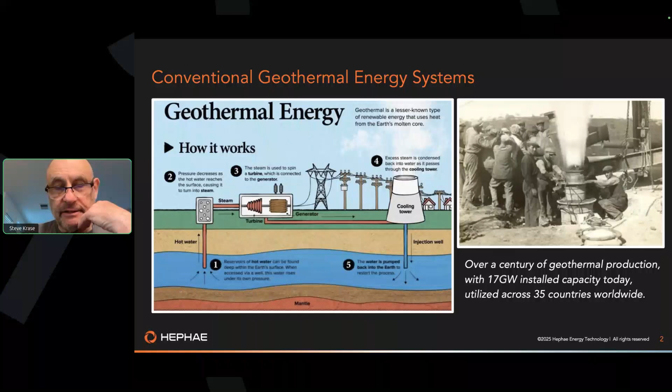But what we're talking about today - the promise has always been, is there any way we can use the heat in the earth without relying on finding these magic pockets of steam or water to create electricity? We've been trying for a long time, the industry has, to figure out a way to take advantage of this heat.

What we're calling next generation geothermal has the promise of generating electricity anywhere on earth by circulating working fluid through what used to be called hot dry rock - now it's just called next generation geothermal. Today there are three major types of approaches to this. There's more, but these are the three we're looking at that seem to show the most promise.

But the other thing you can do is use that hot water for district heating. In Europe, a lot of cities have a district heating network, so you can just take the hot water and pump it into the heating grid, not the utility electric grid.

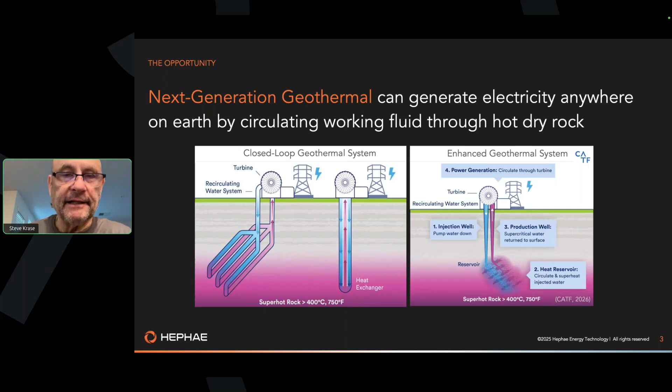One of the things we see as we go around and talk to investors and people not familiar with the drilling industry is the question: why do you need electronics for downhole? There's just a lack of understanding of what's required to actually drill these wells and put them in the right place.

Right now we're testing the MWD portion of this, and we hope to be in the ground with the complete system, including the steering head, sometime in 2027.

The existing system is rated to 210 degrees Celsius circulating temperature, with a 230 C survival rating, but we have plans to push this to 300 degrees Celsius. I'll talk about that in a minute.

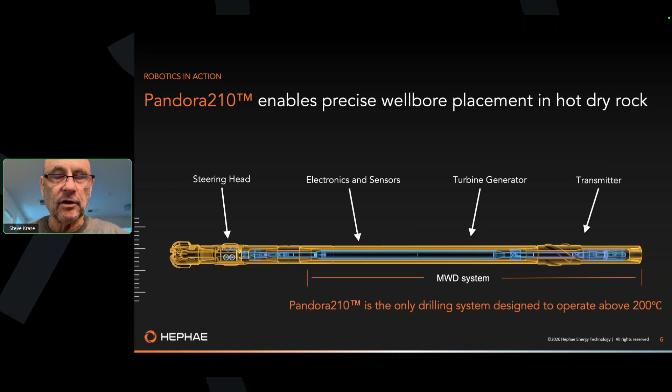So why are we doing this? When you look at the electricity demand projected by 2050, whether it's 50 or 70,000 terawatts, it's a big number, and it's increasing considerably. That's why we're seeing this significant amount of investment projected to continue increasing.

We've just seen the hot rock bill introduced into the U.S. Congress, and Mazama is another company that's drilling EGS wells. They just announced the world's hottest EGS system. They're going to be targeting 370 C rock on the Newberry volcano starting later this year.

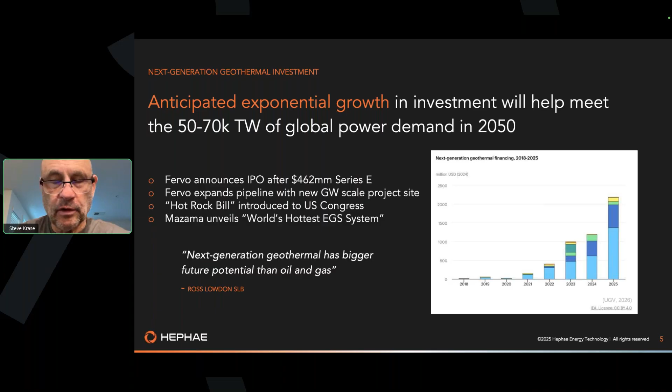So we think, and so does a few other folks in the industry. Here you've got a quote from our friend Ross Lowdon over at Schlumberger, or SLB, that next generation geothermal has bigger future potential than oil and gas. What that means is we believe there could be as many rigs drilling geothermal wells in the United States and around the world as there are oil and gas wells.

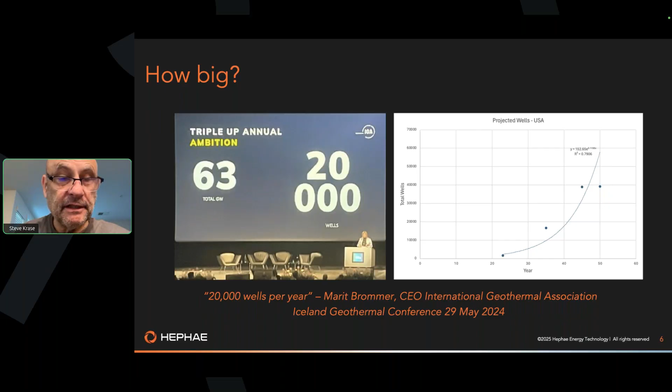This is independent from Marit Brommer from IGA, and her projection is 20,000 wells, total of 63 gigawatts by 2050. And yeah, this could actually be conservative in our opinion.

The goal here is to get to the point where we're competitive with natural gas, and we believe we can do that by combining hotter rock with longer lateral length and bigger hole size. The challenge here is the current projects rely on existing oil and gas technology, and that limits the temperature that we can access.

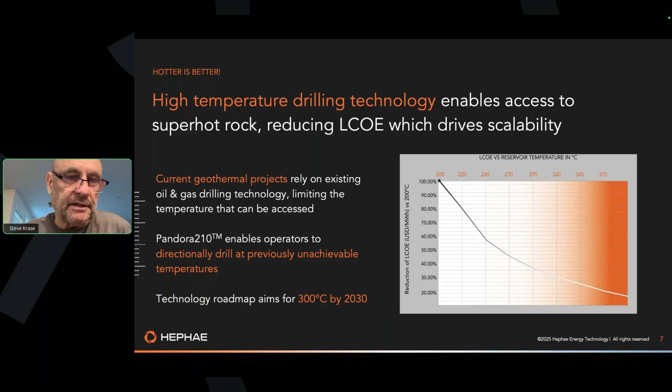So a little bit about the oil and gas capability. When I first started in '78, mil-spec electronics were 85 degrees Celsius, and that's what we used. We inched our way up to 100 and 125 Celsius. And then finally, we had 175 C tools in '96, thanks to our friends at Sperry Sun. And then we really haven't moved very much since then.

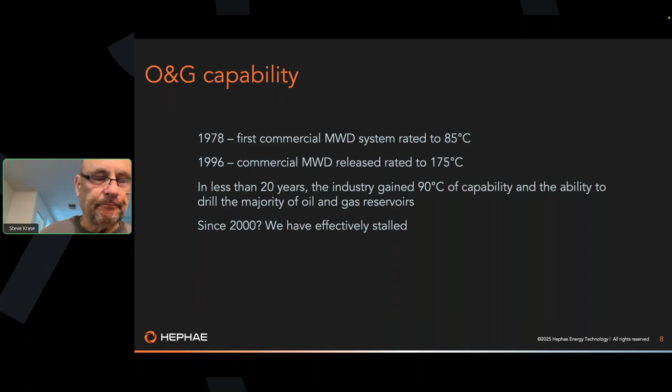There are some systems out there that are 185 C, 195 C, 200 C systems, but they're essentially 175 C systems that have been tweaked. Basically, in 20 years, the industry has gained about 90 C of capability, which gives us the ability to drill the majority of oil and gas reservoirs. But we've pretty much been stalled since 2000.

Some things that we do today to enable the use of standard MWD systems are coated drill pipe, insulated drill pipe, and mud chillers on the surface that can keep the drilling fluid cool. The chillers reduce the temperature of the fluid that's introduced, and the coated or insulated drill pipe can keep it colder for longer. But there's a growing recognition that these technologies just are not a complete solution.

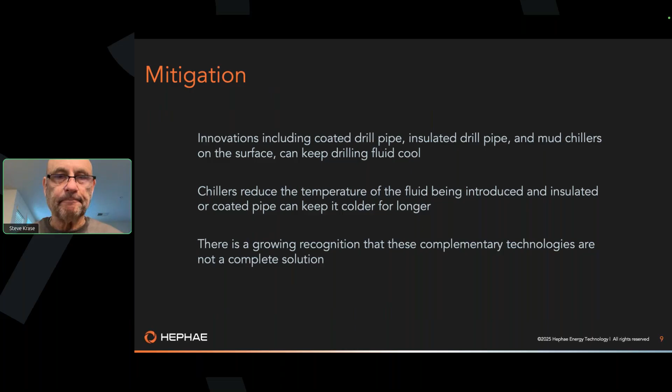One of the other things you hear a lot when you talk about geothermal wells is this story that it's very expensive to drill these wells. Well, you have to be careful when you hear that, because a lot of the times people are talking about older conventional geothermal wells that were drilled without a top drive, without a PDC bit. We believe the state of this next generation geothermal industry right now is roughly where unconventional oil and gas was in 2009. So we expect to see the same improvements in drilling rate and reduction in drilling costs that we've seen in unconventional oil and gas as we get further into this development.

Just as an example, when I started my career, drilling granite was just something you didn't do. In fact, you didn't even want to drill shale. It was not unusual to drill 3 to 5 feet an hour if you hit a shale bed offshore. Now we're drilling shale in excess of 300 feet an hour, and we're drilling granite 100, 200 feet an hour. So we anticipate that improvements in drilling technology here, as we learn more about drilling these hot dry rocks, which are a lot of times igneous basement rocks, we're just going to keep getting better at it.

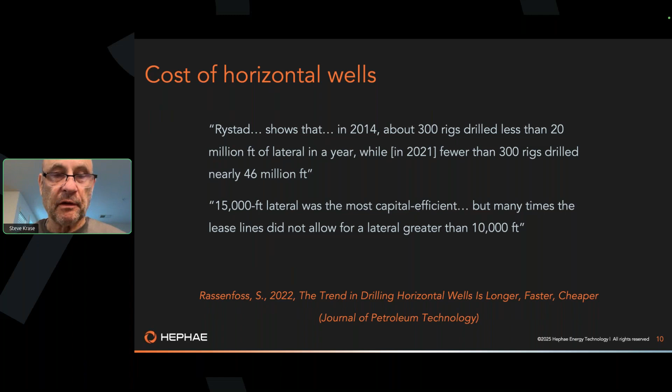Here's an example of the evolution of directional drilling in the United States and its cost. In just 20 years, the percentage of wells in the U.S. moved from 12% to 85%. And as we drilled these wells and gained more experience, we increased performance by more than 3x. We expect the same kind of improvement in next generation geothermal.

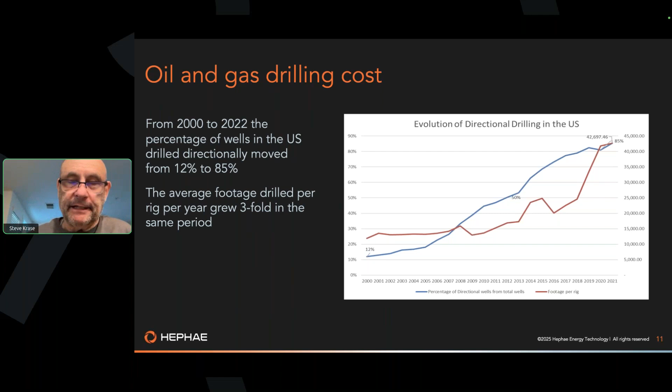So let's talk about some of the mitigation techniques. One of them is insulated drill pipe. There are several different companies out there that use this, and we see it applied especially when you're targeting 350 degree Celsius rock.

Just to put it in perspective, right now the Haynesville is considered the hottest area we're drilling for oil and gas, at least in the United States, with reservoir temperatures in the 200 degrees Celsius range, plus or minus. What Mazama is targeting in the Newberry volcano is 150 degrees Celsius higher than the Haynesville.

And so in that environment, you've got to bring in some other things, but we don't think it's a complete solution. This insulated drill pipe is essentially a flask created in the drill pipe that keeps the fluid cool as you pump it down hole.

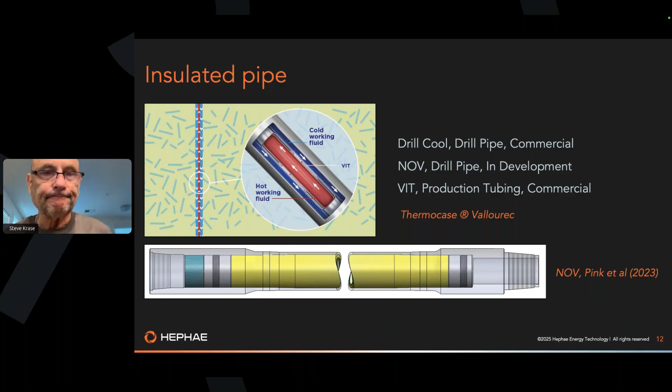The other thing we're seeing is a coating. This is very popular, and we're seeing it a lot in the Haynesville. It's a little more cost effective than the insulated drill pipe. These coatings are being used just about every place that's drilling any kind of wells above 175 degrees Celsius circulating temperatures.

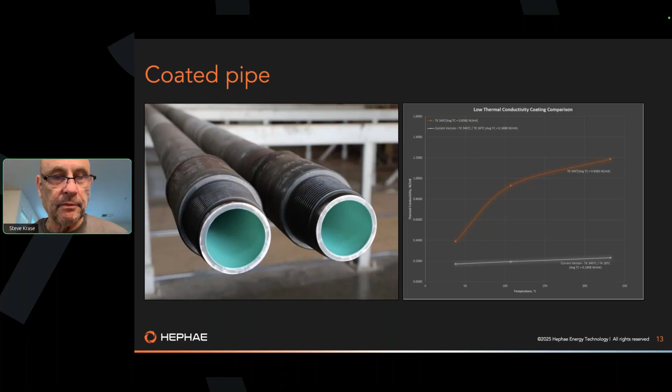The other thing is mud chillers. On some of these installations, we're seeing upwards of 2 to 3 mud chillers on location that are used to chill the mud as it comes out of the hole. It goes through these chillers, reduces the temperature, and then gets pumped back down the hole again.

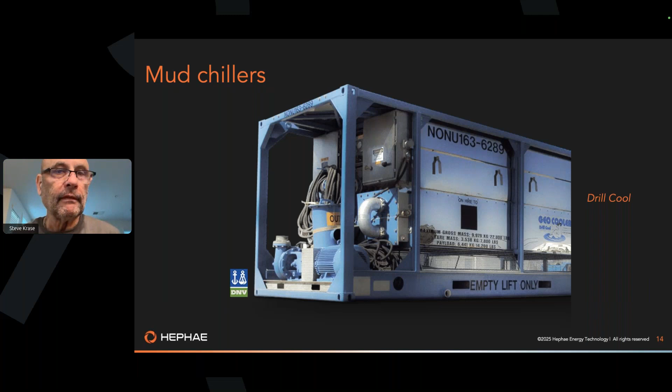So what we see these companies doing is something called staging. You've come out of the hole, you're in 250 degree Celsius rock, 300 degree Celsius rock. You've successfully kept it down below 200 degrees Celsius. You come out of the hole.

Now you've been out of the hole for 24 hours. The drilling fluid left in the hole has increased in temperature, approaching the formation temperature. You cannot run straight back to bottom because of limitations, primarily on the electronics. So you have to stop, circulate - it's called staging - cool down the mud, go a little deeper, stop, cool down the mud again, until you get it down to the point where the MWD equipment can handle it.

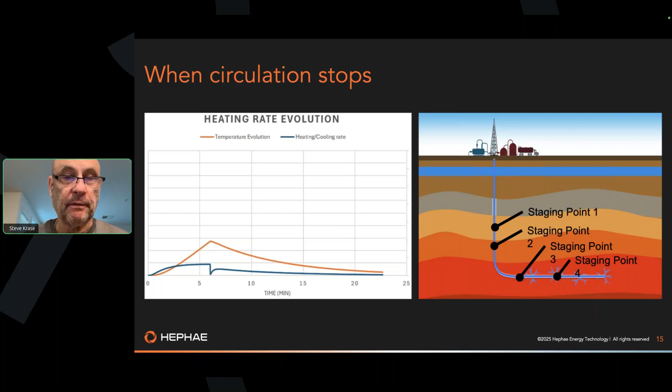This is very expensive, and it's one of the reasons why coated drill pipe, insulated drill pipe, and chillers aren't the complete answer. You still have to be able to get back to bottom without having to stage. So it's a huge savings to operators if we can eliminate this staging.

And this is what we would expect. There's a general rule that for every 10 degrees of temperature increase, you get a reduction in reliability by 50%. This kind of supports that.

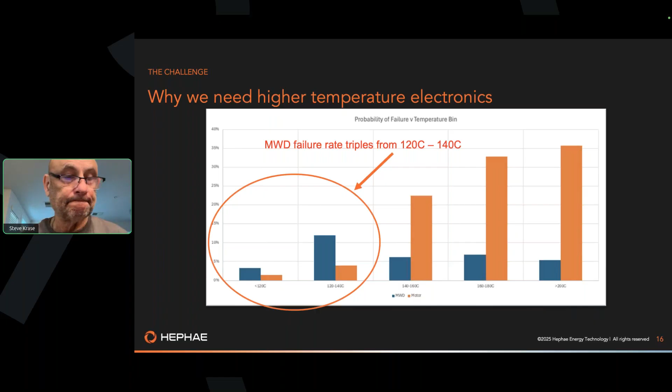Okay, let me go back. Sorry guys. What we will do is package this in silicone, or what we used to call it at Baker Hughes, Pookie, and just cover it up to protect it from shock and vibration. That's great for shock and vibration, but not great for temperature dissipation.

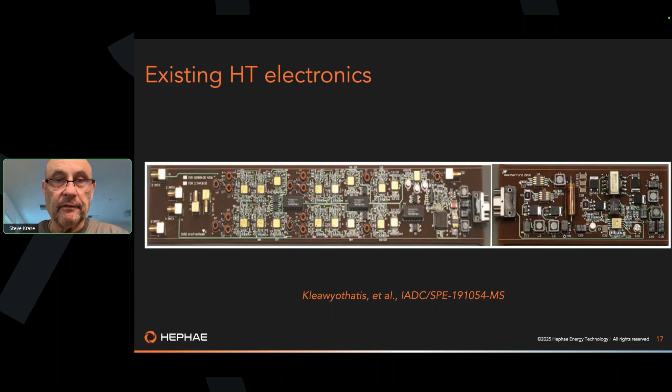So the historical approach is we screen electronics, put the high temperature rated components on a printed circuit board, and then screen them. We figure out which boards actually will work, and that's typically how we've developed high temperature equipment. We use screening of components and systems to get to the highest temperature we can, but we don't believe that can reliably get us above 200 Celsius.

Again, we think this has to go to 300 Celsius. So one of the things I've learned through my career is that if you want a step change in performance, you've got to start with a blank sheet of paper, and that's the approach we've taken. I'll show you that in a minute. But the historical approach has been screening.

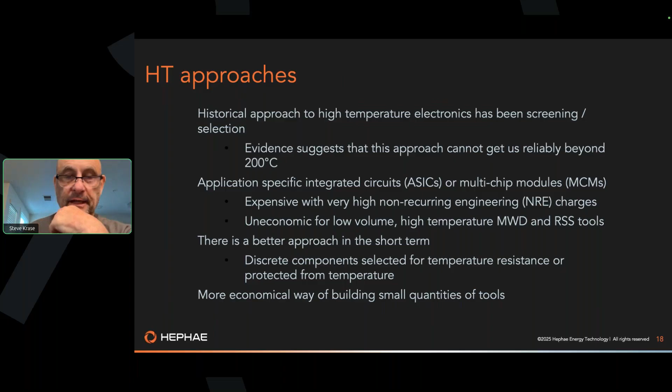You can also do ASICs or multi-chip modules. The challenge with those is they're very expensive and very high non-recurrent engineering if you have to make changes. Very expensive systems, uneconomic for low volume, high temperature measure-while-drilling rotary steerable tools. We believe there's a better approach in the short term by using discrete components selected for temperature resistance and protecting them from temperature. It's a more economical way of building small quantities of tools.

So when we look at this, we look at three key requirements. First, you've got to protect the assembly from the external borehole temperature. The way we see it, the mud chillers, the coated drill pipe, the insulated drill pipe do a pretty good job of keeping the drilling fluid cooler than the surrounding rock, at least while you're circulating. So we have that. Secondly, you've got to protect the components from themselves and quickly move the heat that the components generate internally.

John, my partner, John Clegg, likes to use the analogy of your cell phone. If you stay on your cell phone for very long, it heats up, and the same thing goes for downhole electronics. The electronics will heat themselves up, and we've got to move that heat away quickly to someplace it's not going to do any harm. We can't destroy the heat, but we can move it, and that's our focus.

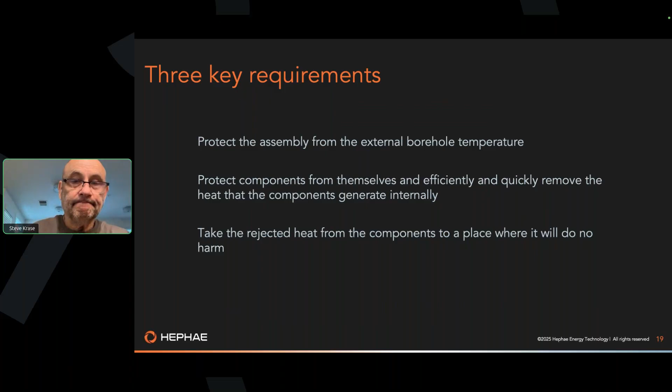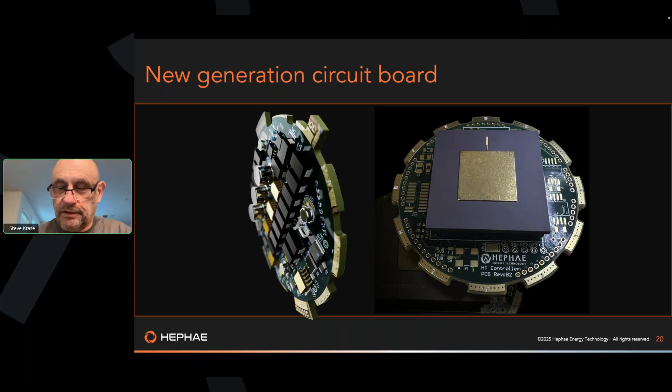It essentially operates sort of the reverse of a choke. The heat wants to move out radially from the center of that component. We've got special material embedded inside the actual circuit board itself that prioritizes heat dissipation. So we're moving heat very rapidly out to the tabs on the side of those boards, and then we have a stack of them. You can see the tabs are actually aluminum.

They're actually aluminum guides that will take the heat and move it out to the pressure barrel and down to a bulkhead we have at the bottom of the system. So heat comes off the center of the components very quickly out to these outer rings, and then it moves the heat out into the drilling fluid. With the drilling fluid going past, we've got a continuous heat sink that we take advantage of.

To remain cost effective, the cooling must be used selectively. You don't want to make the whole assembly work natively at the maximum rated temperature. If I have a set of electronics that works up to 300 degrees Celsius, I don't have to worry about it. If I have electronics or sensors that only go to 210 or 250, I can isolate those and treat them differently with some other cooling method.

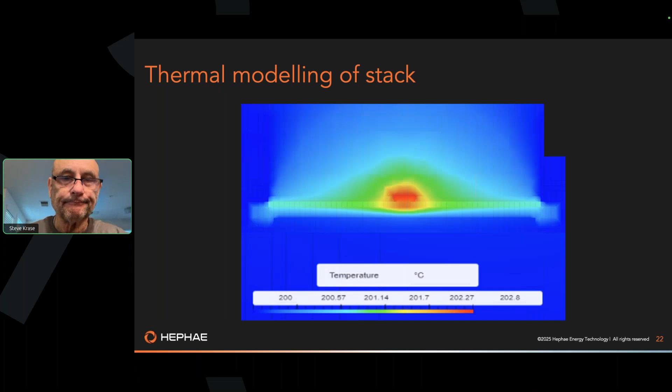So you don't want to cool the whole assembly. With the system that we have, we don't have to cool the whole assembly. If we want to cool something, we can put it into a separate chamber and keep it in its happy place. The design is optimized to allow for modular cooling.

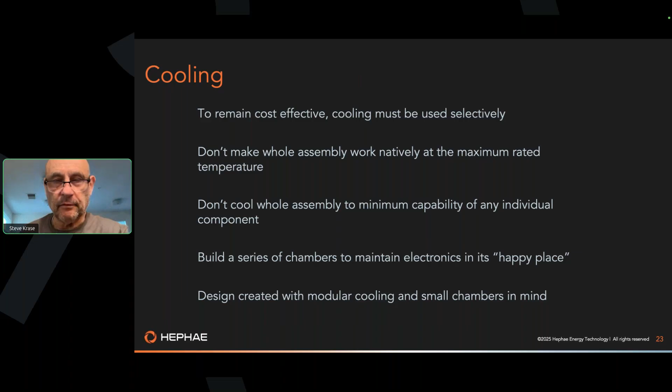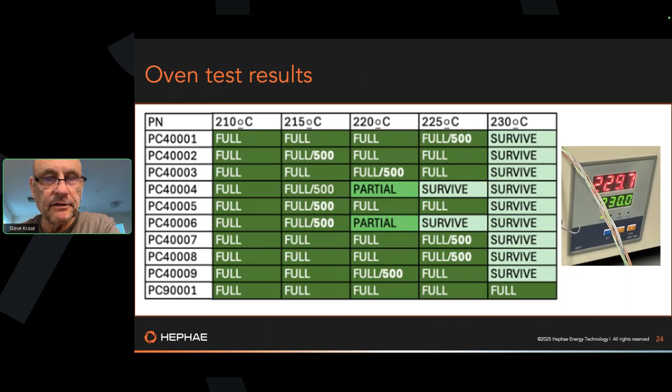We have done Hall testing on the system. Everything has been tested above 230 Celsius, 30 Gs of vibration, and everything is working above 210 Celsius with survival up to 230 Celsius.

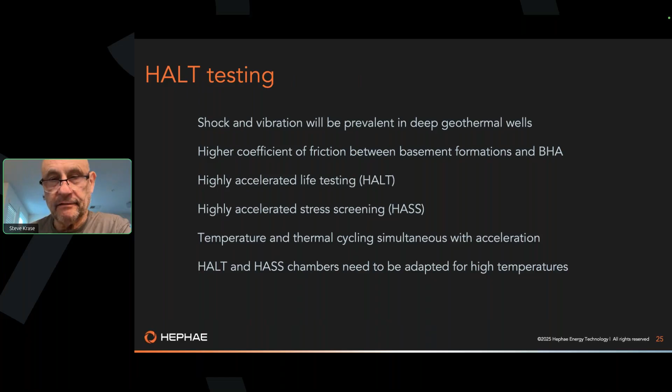We think that the shock and vibration in these deep geothermal wells, considering the high coefficient of friction in the granite, means we're going to see a lot higher shock and vibration conditions than we see in oil and gas. We've tested everything at a 50% increase of shock and vibration over what we'd normally do with oil and gas systems, using highly accelerated life testing to find the weak links, and then HASS screening for manufacturing and production.

I'll show you guys a little video. This is from testing we did at Dynaqual, here in Houston, a great independent lab that's been around for over 20 years. They do a lot of testing for the major service companies and also for NASA. I'm just going to show a quick video here that my partner John Clegg put together.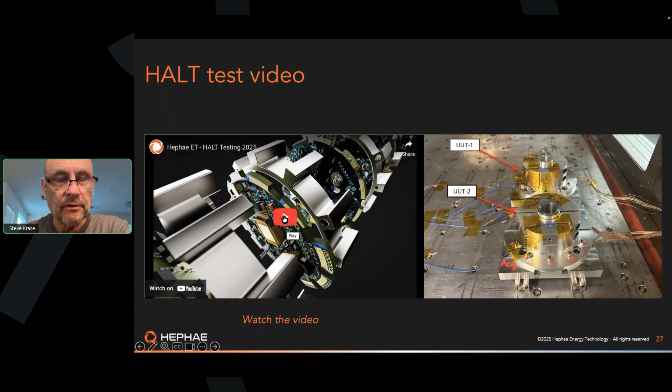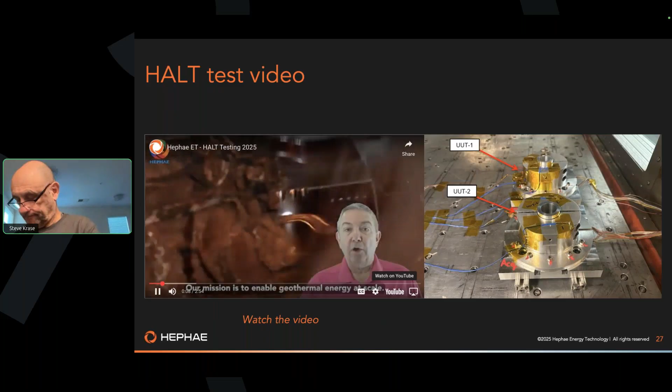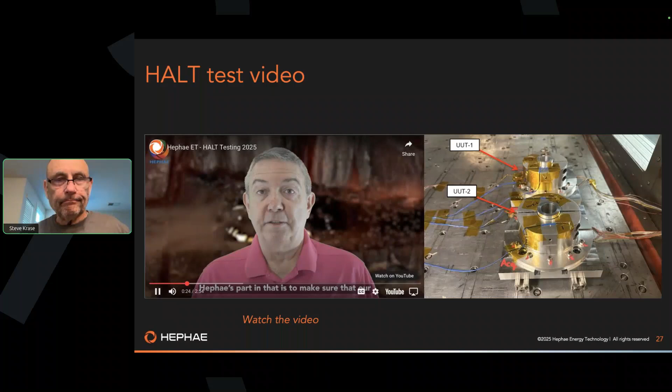Hi, John here from Hephae. Our mission is to enable geothermal energy at scale. To do that, the industry needs to drill wells which are deeper, hotter, and in harder formations than the oil and gas industry ever saw. Hephae's part in that is to make sure our equipment survives and thrives in those difficult environments. So before we even think about putting a tool down hole, we subject our technology to the harshest laboratory test conditions that drilling equipment has ever seen.

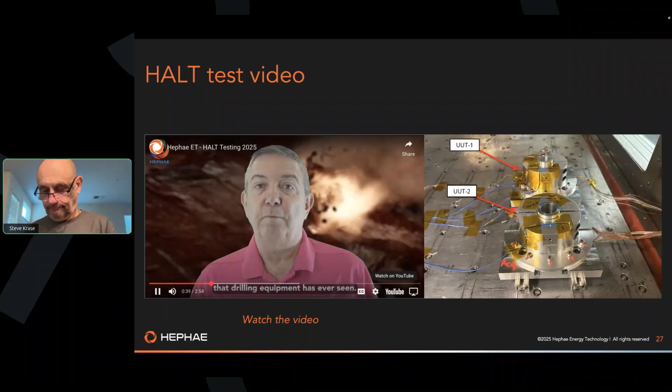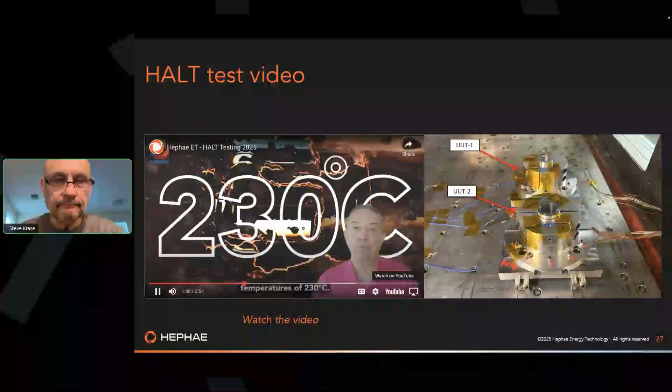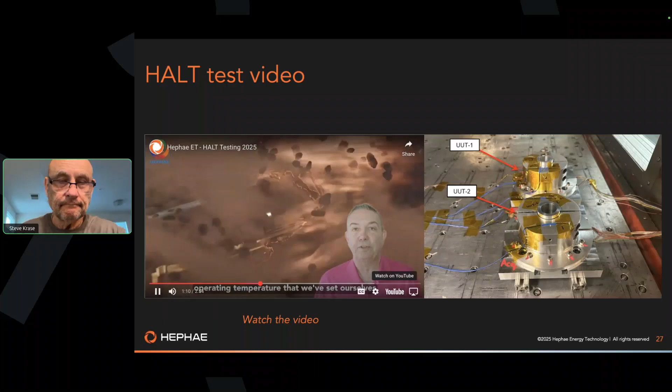During the course of last year, we did a lot of oven testing of all our printed circuit boards. We subjected them to high temperatures under full operating conditions to see where they would survive and where they would operate. I'm pleased to tell you that everything passed. All of our boards survive at temperatures of at least 230 degrees Celsius, and they all operate successfully for extended periods at temperatures significantly higher than the 210 degrees Celsius operating temperature we've set for our first product, Pandora 210. Then we take the boards and put them in a vibration chamber.

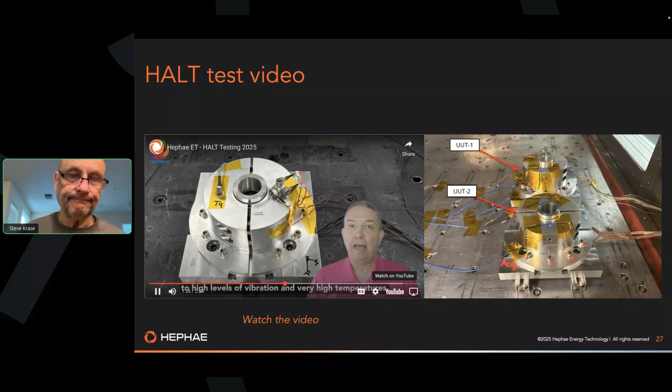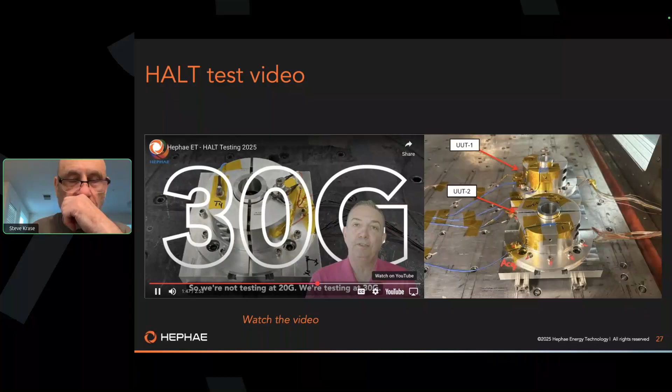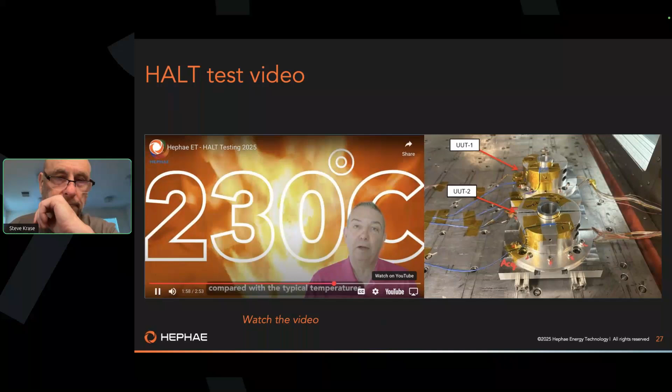Here we're taking a board or assembly and subjecting it simultaneously to high levels of vibration and very high temperatures. Typically in the oil and gas industry, boards are tested to about 20 G of continuous vibration. But we're designing these tools for geothermal wells, which are going to be deeper, in harder formations, with more friction and more vibration. So we're not testing at 20 G, we're testing at 30 G, 50% higher than typical oil and gas tools. And we're testing at 230 degrees Celsius, which is very high compared with the typical temperatures oil and gas tools are rated to.

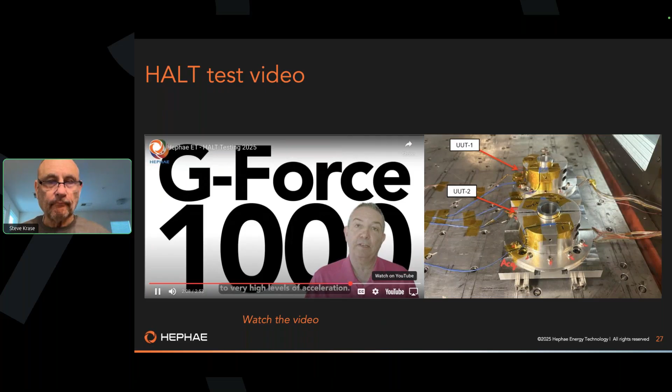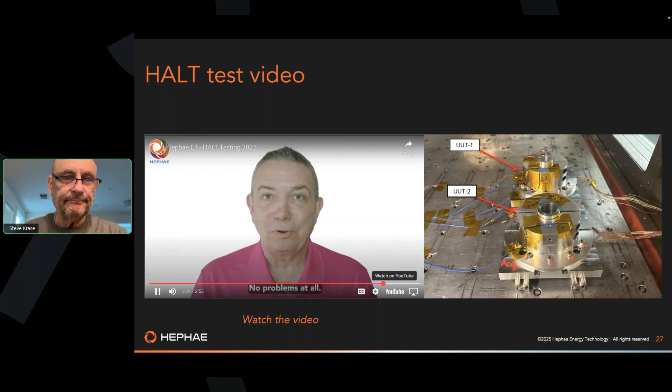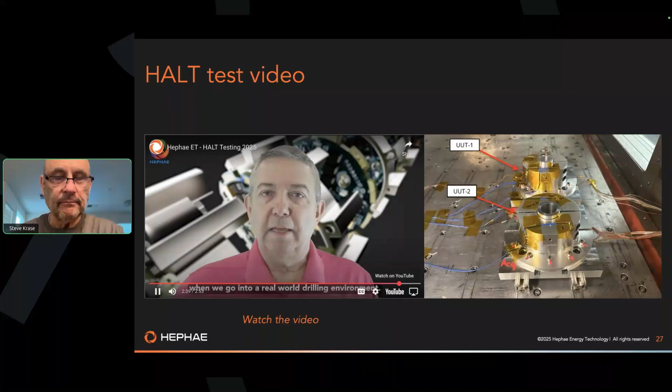Shock is where we subject the unit under test, the board or assembly, to very high levels of acceleration. We take the board in its assembly, lift it up, and drop it. Bang. Then we lift it up, bang, drop it again, and again, and again, many times. The great news is, all the boards we've tested so far through this punishing regime have all passed, no problems at all. Successfully concluding these tests gives us the confidence that we will work first time when we go into a real-world drilling environment. It's not sci-fi, but it is rocket science.

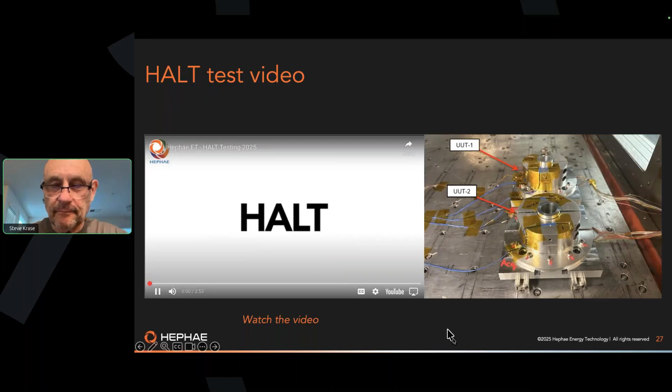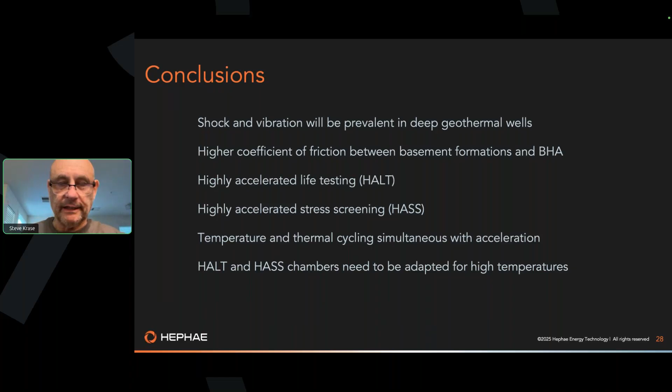Okay, I'm going to get a couple slides here to wrap up. So we know shock and vibration is going to be tough in these deep geothermal wells. High coefficient of friction, this is going to be a challenge, absolutely no doubt about it. We've done the very most we can do from a highly accelerated life testing standpoint, and we're screening everything also with temperature and thermal cycling simultaneous with acceleration. One of the things we've seen is we're up against limits, at least locally, on the combined temperatures and shock and vibration that we need to see. Right now we're able to test at 230 Celsius, but at the end of the day, we're trying to get systems to work at 300 Celsius. So we need to be testing well above 300 degrees Celsius, and finding those chambers, at least locally, has been a bit of a challenge.

The three key requirements for these electronics are: protecting the assembly from the borehole temperature, from the formation temperature, and then protecting the components from themselves by moving the heat and putting it someplace where it's not going to do any harm, which is into the drilling fluid. We've demonstrated that this stack of circular boards can meet these conflicting requirements, and looks like everything is working well above 200 degrees Celsius. We think we can get up to 220, 230 Celsius with the existing packaging scheme that we have.

In order to go to 300 and above, we're going to have to bring in some other things, and we're working on that. We're just about to get a Space Act agreement signed, which will give us access to some of the technology being used on the Venus rover. That's going to be going to 500 Celsius. So we have a roadmap to get to 300 degrees Celsius by 2030. So that's me, guys.